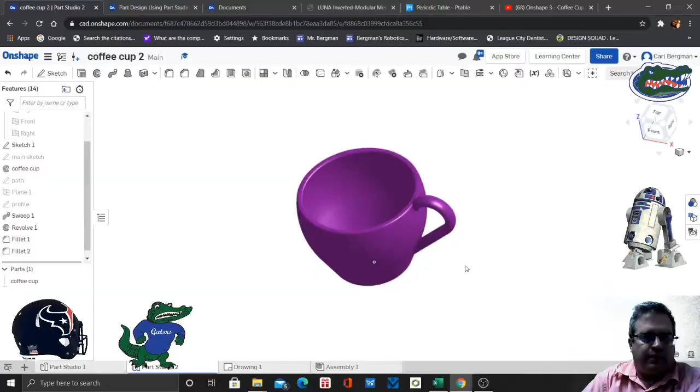Alright guys, we're going to create a coffee cup that you can drink out of. Alright, so first off you're going to go and create your sketch, call it coffee cup, and you're going to sketch on the front. This is a self-paced tutorial that is in your learning center that you can, I'll show you that tomorrow. Kind of a step-by-step guide on how to do this.

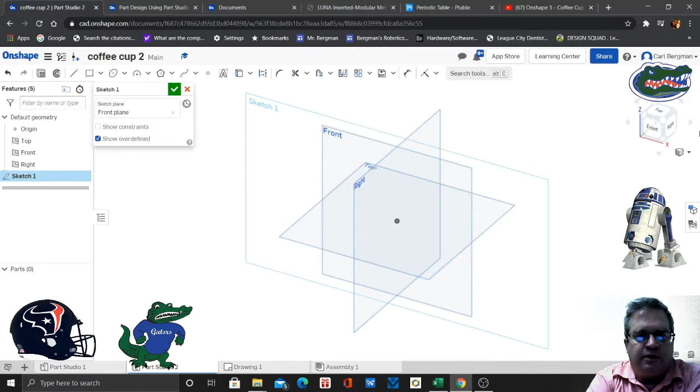We're going to go sketch and we're going to select front, and we're going to trace the profile of your coffee cup. And this is just going to be a cross section with the thickness of your coffee cup at about 6 millimeters, and that also includes the bottom of your coffee cup as well.

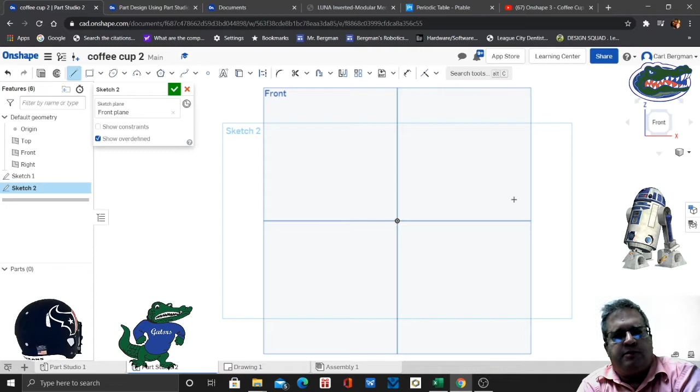You don't want your coffee cup to be too thin or it will melt, or it won't hold the heat in, and when you're actually holding your coffee cup you can burn your hands. So 6 millimeters I believe is the recommended thickness on a coffee cup that's made out of plastic, and this will be made out of plastic. So

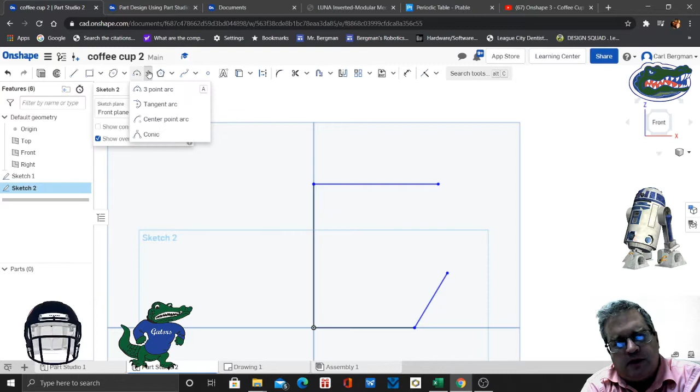make sure at one point that you cross the point of origin there in the center, and we're going to press escape to let go of the line, or you can go press the line. 3-point arc, we're going to connect that and make sure that it gives us the tangent symbol there, right there, and click OK, or click on the line. We're not going to click OK yet, so we got to do our dimensions first.

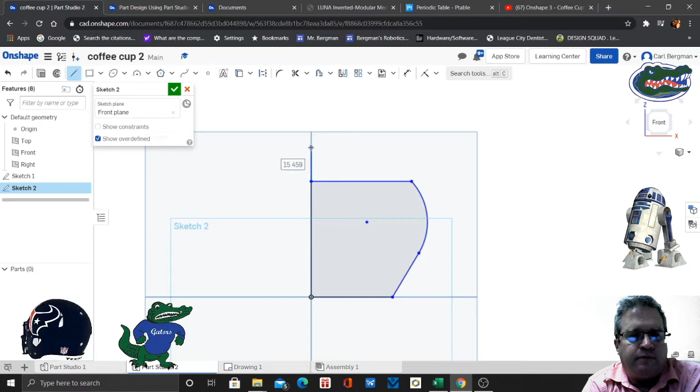Alright, so we're going to create a construction line, which is going to be our center of rotation. Just FYI, make sure that line is a little bit longer than the one I just drew there, because we're going to change the height of the coffee cup, and that thing's going to get buried. So self-paced tutorial is pretty detailed. We have to put in our diameter of our top and bottom. This is probably the trickiest part.

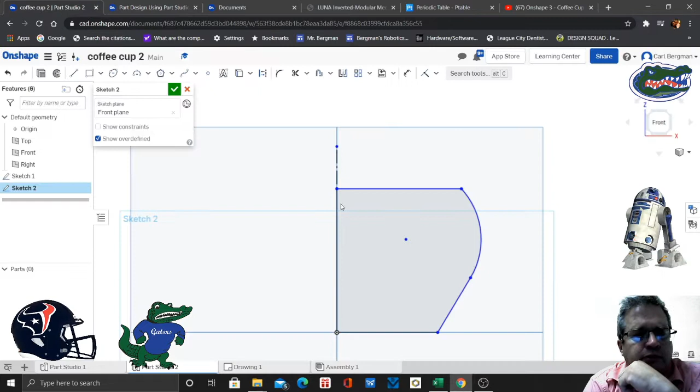You have to select the edge point dimension, the point on the edge, and then your construction line, and that's going to give you the diameter of the entire top of the cup. So you got to do it in that order. Well, actually not that order, but you have to select those 2 points, the line and the edge. Do the same for the bottom. You have to select the bottom point in the construction line, and that's going to give you the diameter that everything's going to rotate around.

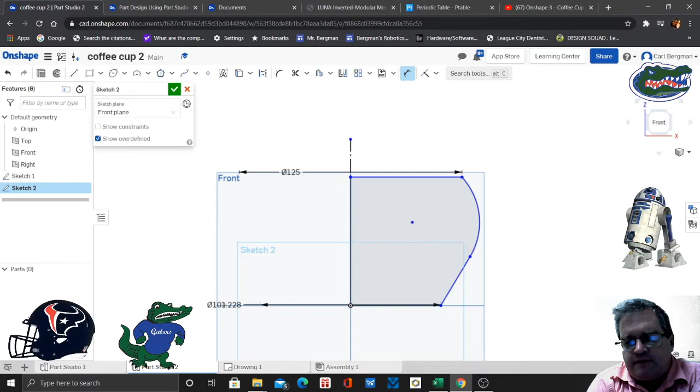So this is constraining it to the measurements. Otherwise, it's not going to revolve correctly. It's going to have some weird outcomes. All right, so you want to make sure that you can see your numbers, so that if you want to go back and edit this stuff, it's easy to locate your numbers. All right, so

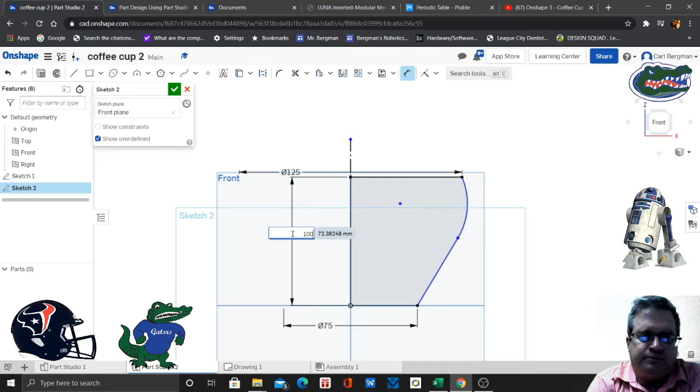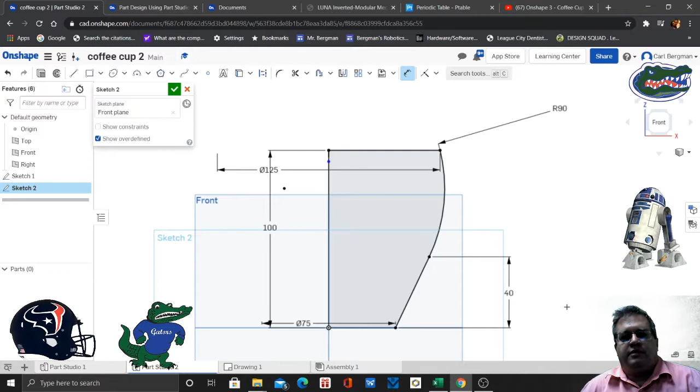okay, that's going to be a 100 millimeter height on your coffee cup. I don't know how many inches that is, but then we just buried our construction line. Then from there to there, I believe is it 25, 40. Okay. Then the radius, I believe, is 20 or 25. Better check. 90. I'm thinking of the pegboard that we're doing. Okay, so 90.

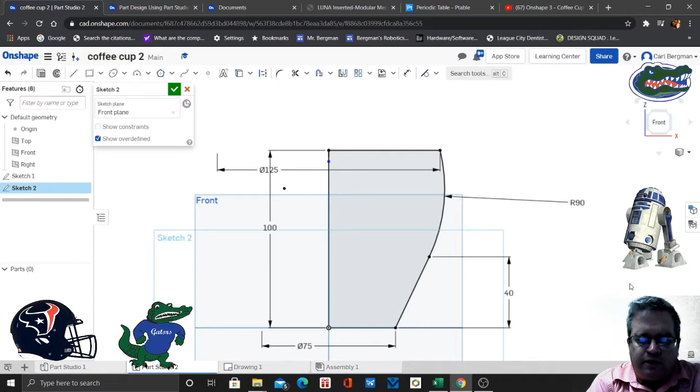All right, so deselect your dimension, drag the numbers down to where you can see what's going on. Just to be on the safe side, make sure those two sides are tangent. I've seen some weird things happen where you throw measurements in and it does some weird stuff to your sketch. All right, so now we got our measurements in, so we're going to do an offset.

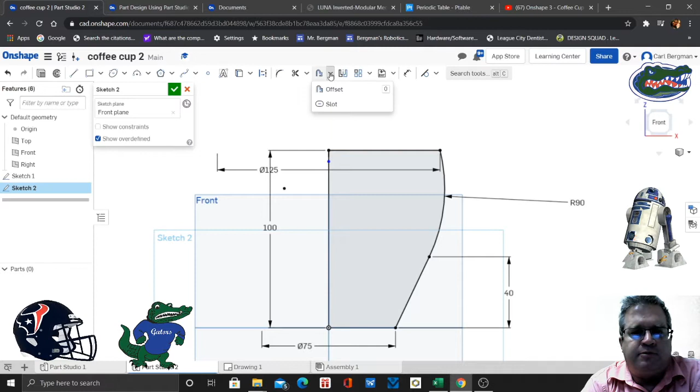So we're going to basically select the outer edge of our cup, do a 6 millimeter offset, and that's going to give us a 6 millimeter thickness on our coffee cup. All right, so find the offset button, and there it is. And we're going to select the bottom and the 2 segments on this side. And I think the default is 6 millimeters, but

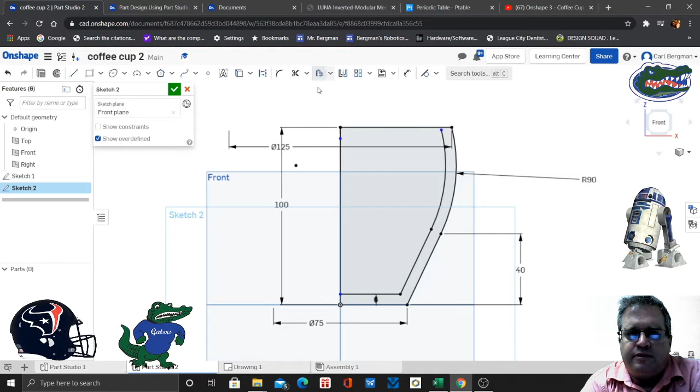we'll have to see. And also, you can see that I'm not connected at the top, so you can stretch it out and see what the number is, and you just type in 6, and there's our measurement, and turn it off, and then drag it down to the bottom.

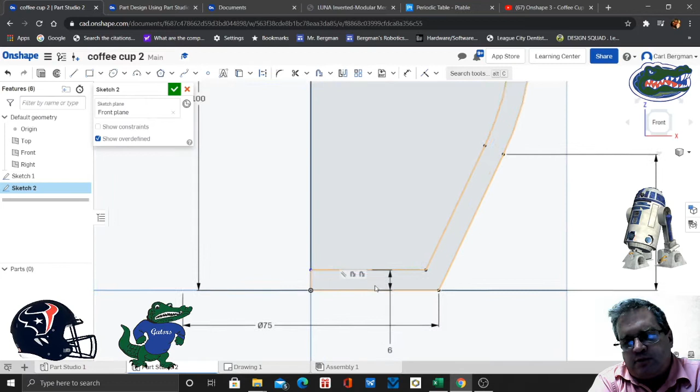So if you look at the top and it's not connected, that's not going to extrude or revolve correctly, so you have to fix that. So you select the end point and then the line, go to the top and pick coincident, and it's going to connect that. And then you want to check the bottom just to make sure. It looks like it is, but sometimes it's not. But you can click on the show constraint and it'll show you whether or not it's connected, and that's the little constraint symbol.

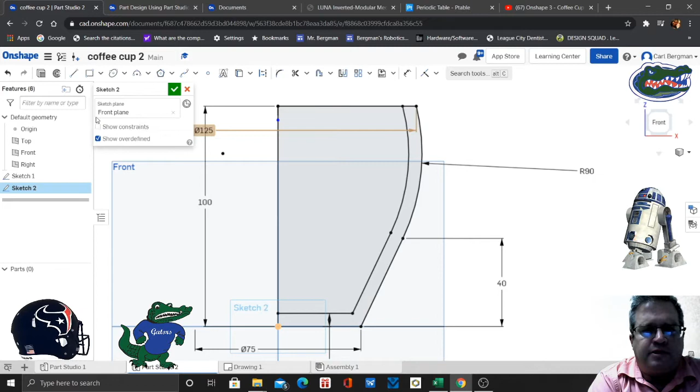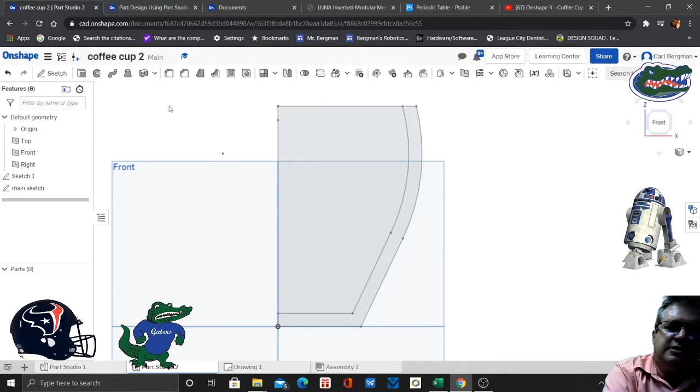Looks like everything's good. So this is your main sketch. And so you click on the little pencil, and it'll let you edit the name and type in main sketch. So there's the pencil, and type in main sketch. And this helps if you want to go back and change the design of your coffee cup before you print it.

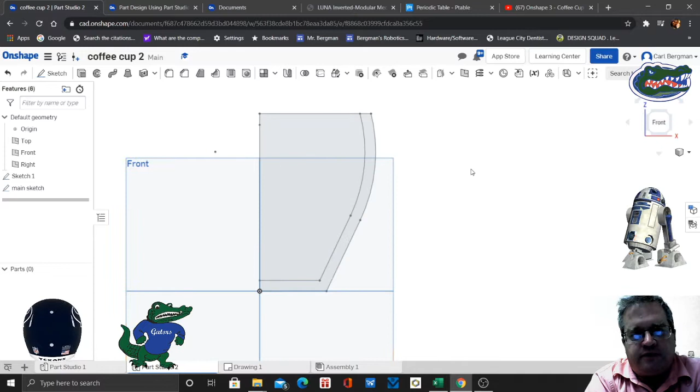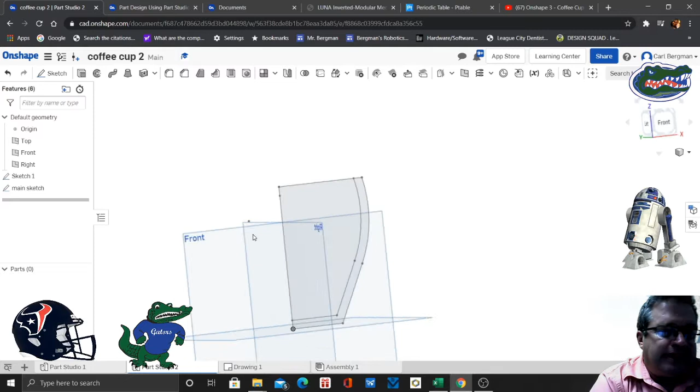Next, we're going to revolve, and so we're going to make a solid cup, and then we're going to hollow it out after we put our handle on it. All right, so we're going to revolve, and we're going to pick both the inside of the face and the offset. Revolve axis is, we're missing our construction line, so we have to go back and draw in a construction line. So you have to go to main sketch, right click and edit, and that will allow us to put in our construction line.

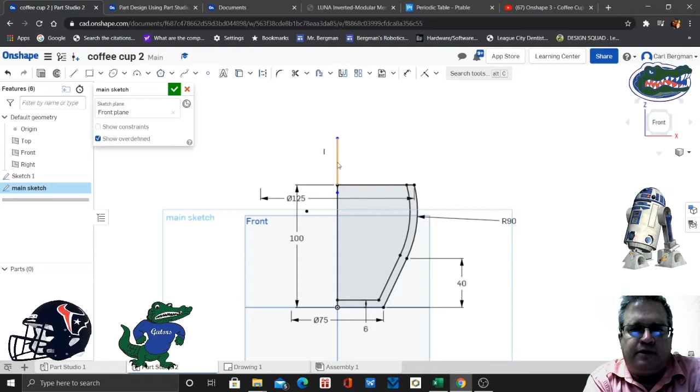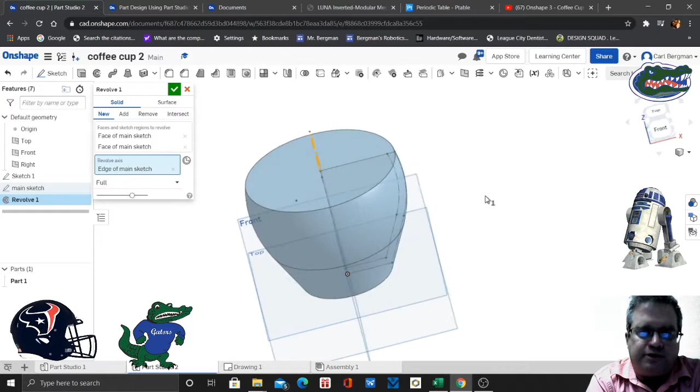Okay, so we have to reapply our construction line. No big deal. Escape to let go of the line, and then select the line again and pick construction. All right, and then click OK, and then we're going to go create our solid coffee cup. We pick our two faces, and then we pick our revolve axis, which is the construction line.

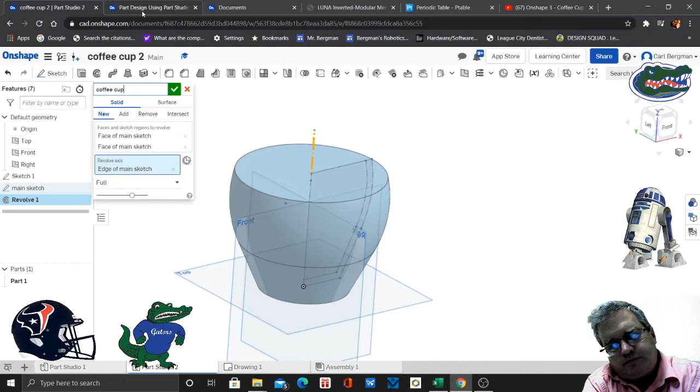All right, so then we're going to rename, and that's going to be renamed as coffee cup. Click on the pencil and then type in coffee cup. All right, so next part is the handle. This is the trickiest part of the sketch because we have to do a tilted plane.

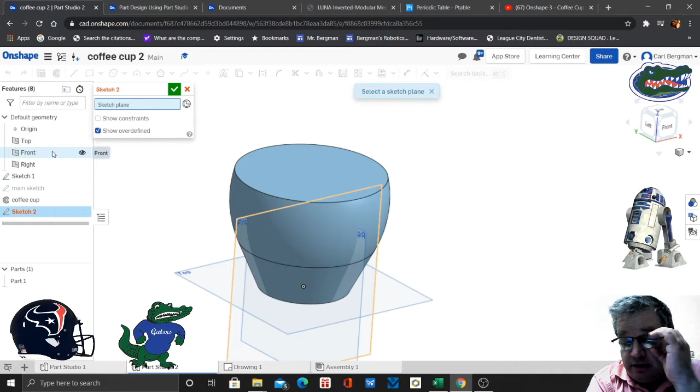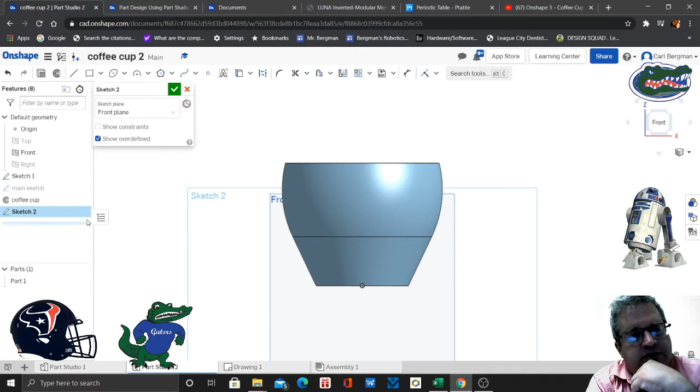All right, so you turn on the front plane, and we're going to turn on the main sketch. You want to see the main sketch, so turn that on so you can see it. So our line that's going to be our handle is going to be attached to the inner side of the cup. We want to make sure that handle is securely printed into the cup itself.

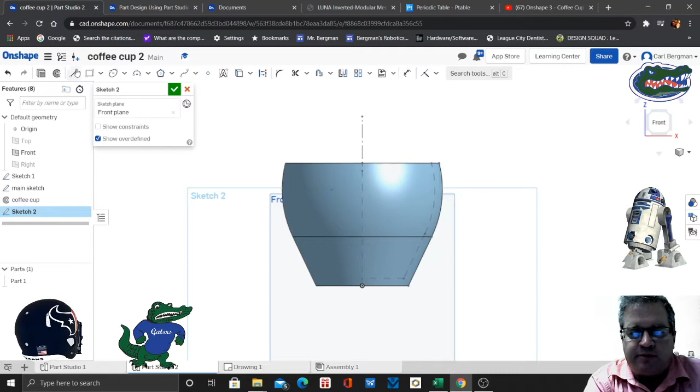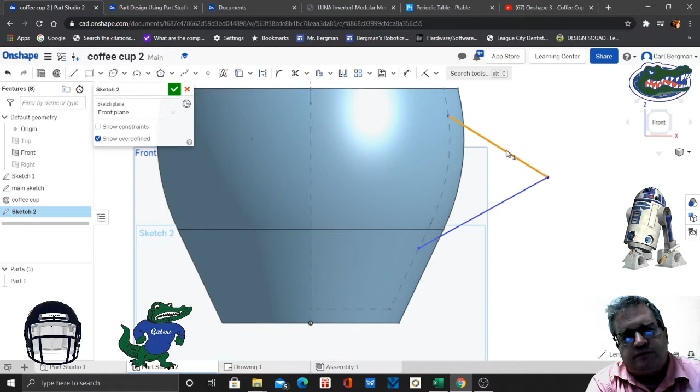So we're going to go to the inner line, and we're going to draw out, not straight, kind of a diagonal, the bottom of our handle, and then we're going to create a reference point construction line because we need 2 points for our arc. So that second line is going to be a construction line, and then we're going to do a 3-point arc.

Make sure it's tangent, and you'll see the little tangent symbol. There it is. Place it, and then my arc is, you have to make sure it's not a construction arc. So there you go, get the tangent and place it. So you get the tangent symbol there, and then we're going to look at dimensions, which is 25 and 85. So the bottom is 25 millimeters from the bottom of the cup.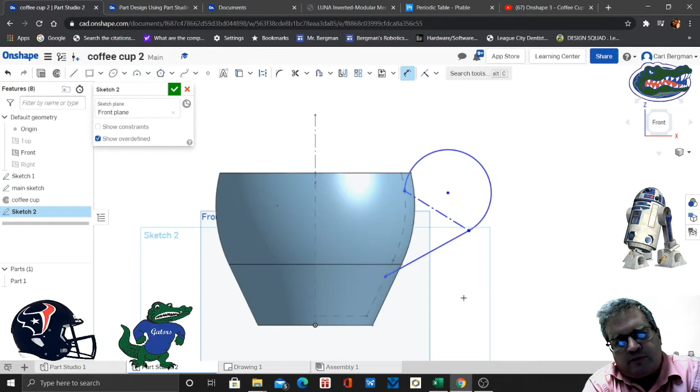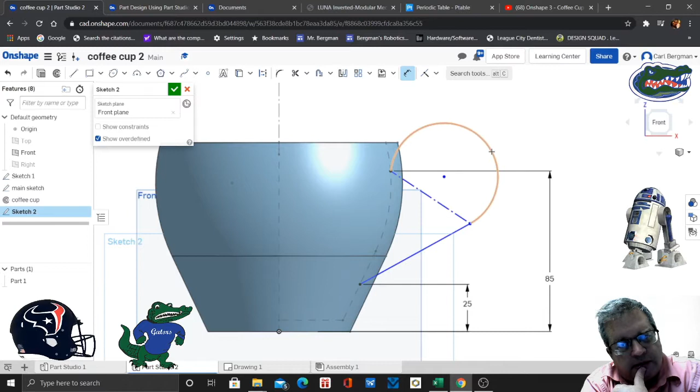So if you have a mistake in your connections on your main sketch, you're not going to be able to place these measurements there. It's not going to let you do it if there's a problem with your connections. All right, so that's going to be 25 and 85. So it's 85 on the very top. All right, so then that arc is 20, and that brings it way down.

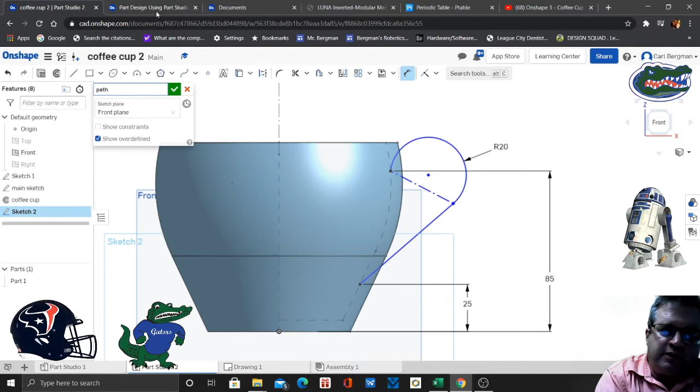Okay. Now we have to create a starting point for our sweeping action. Oh, this is the path. This is the path for the handle. They just call it path. Okay.

So if you, oh, excuse me again. So if you want to go back and switch the path height or from the bottom or the top, then you can quickly select the path. All right. So what happened to my top?

I think my Norton antivirus is coming on.

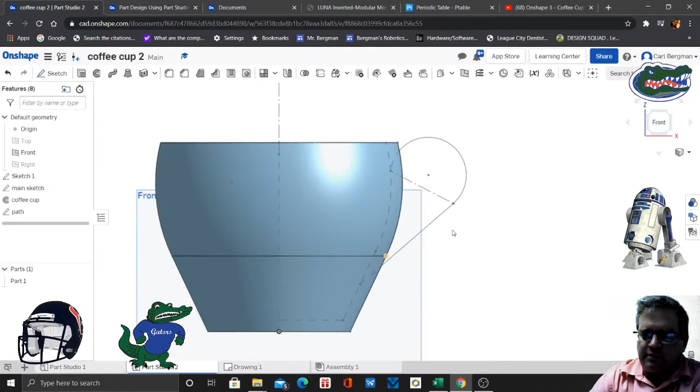All right, so now you're going to go create a plane, and it's going to be a curve point, and you're going to select the entity, which is going to be that line and the end point, and that's it. And so it's going to create your curved point, and then you click OK.

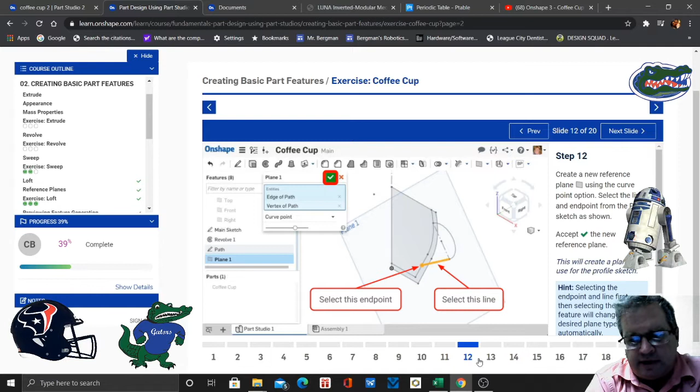And then on that plane that you just created, the tilted plane, you're going to create an ellipse, and it's going to be 10 by 14, and that's going to make it a little bit thicker on the width than on the depth of your handle, and that actually creates a little bit of a sturdier handle.

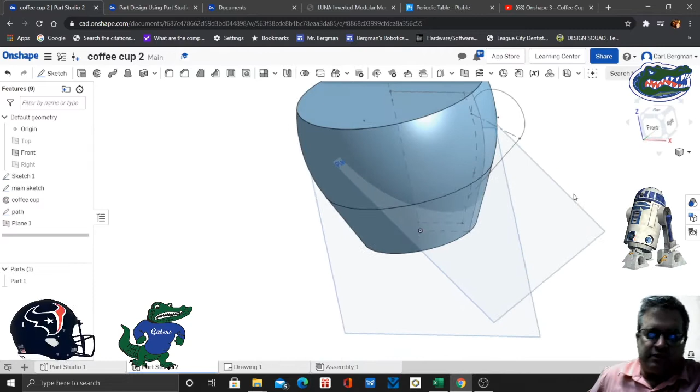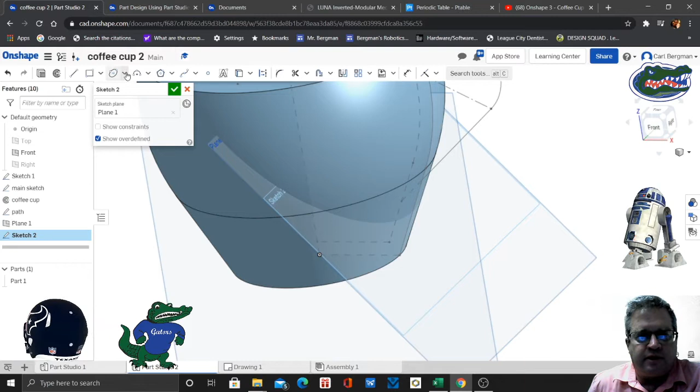All right, so we're going to sketch on that new tilted plane, and we're going to just do a single ellipse (10 by 14). Okay. All right, so sketch and select ellipse, not a 3-point circle, an ellipse.

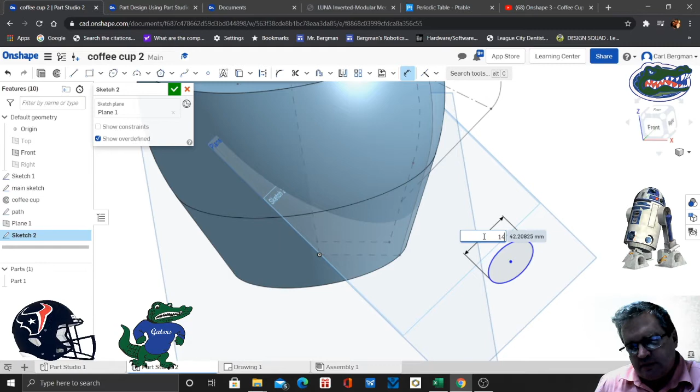Then you get the dimension tool, and the dimension tool is going to help you fix this. All right, so from left to right is going to be 14. That's millimeters. If you're on inches, this is not going to make sense. And then from top to bottom is going to be 10. All right.

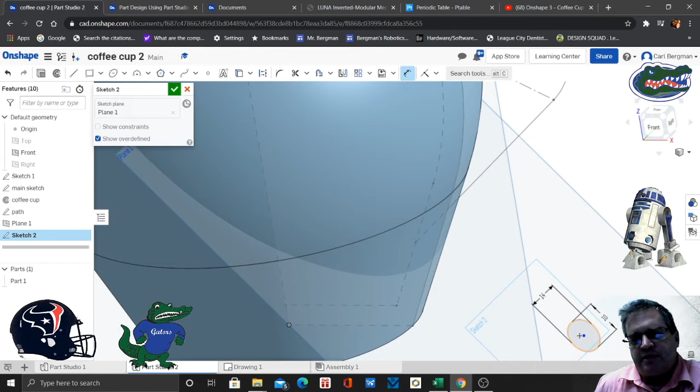All right, so first of all, deselect your dimensioning tool, or it's going to think you're trying to get a measurement. You want to select the center of that circle and the end point, and make sure your tool's turned off, any warning dialog box is turned off. So select your point and then the center of your circle, and you're going to go coincident.

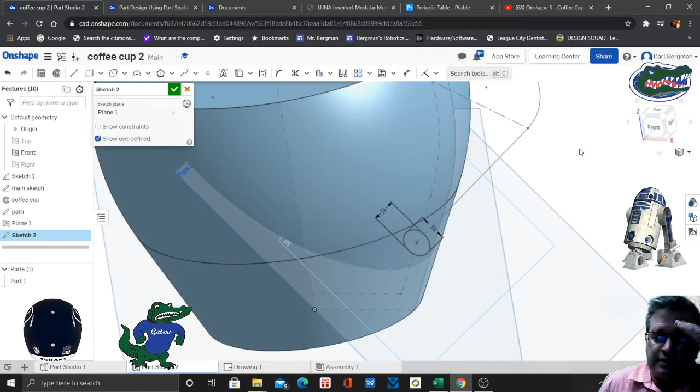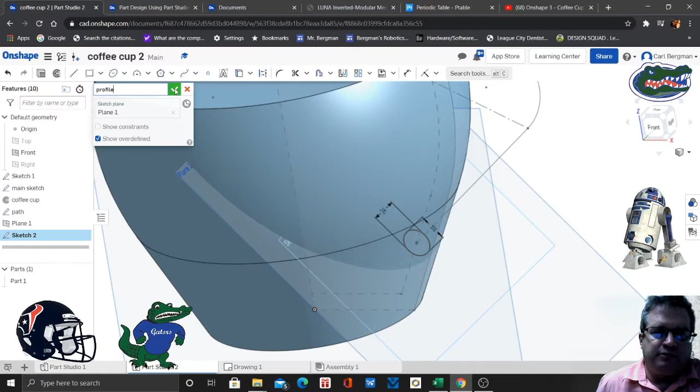And then looks like you're done, and now you're going to do the sweeping tool, and then we're going to flare the edges, the top and bottom, so that the rounded off top is going to help so you don't injure yourself while you're drinking your cup of coffee. So this is a profile, and this is what your handle is going to look like. So that's what we call the profile. It's the depth and width,

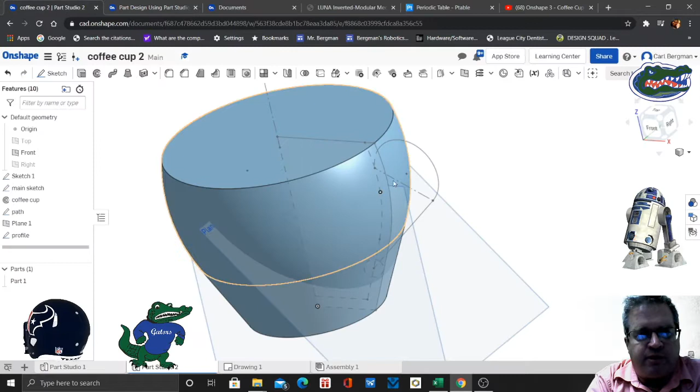and you've got your path already drawn in. So now we're going to go to the sweeping tool, and we're going to create our handle. And then it's important also when you do this that you merge with all. You want the handle to become part of the cup. You don't want it to be a separate part.

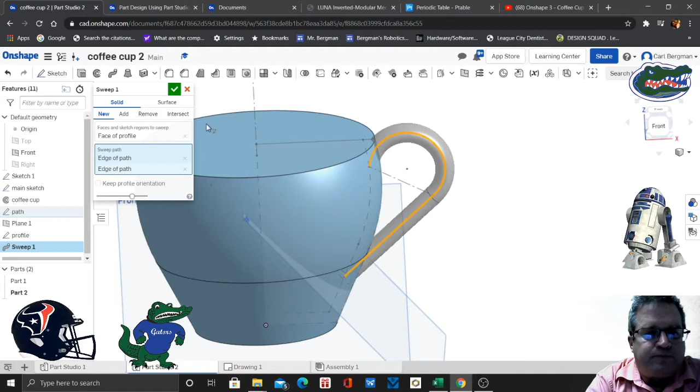So we're going to go sweep, and we're going to select our face, which is the, turn the coffee cup off. The face is going to be the ellipse, and then the path is going to be the two segments, the circle arc, and then the line segment. So there's your handle. Merge with all. Click on add. You're going to add and merge with all.

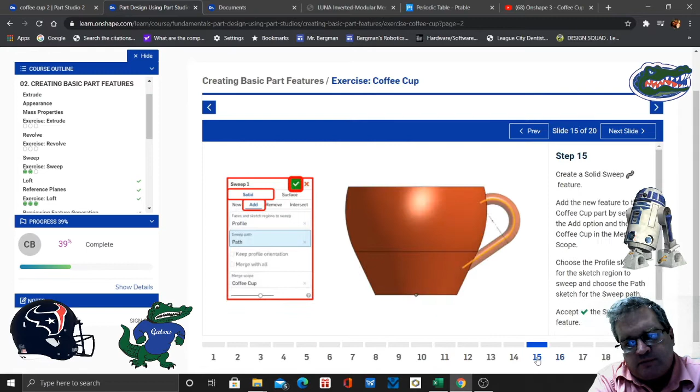And now we're going to hollow it out. This is a little bit trickier. That's why it's important to have your construction line above there, because our first attempt buried it. But you see it up there. All right, so now we're going to hide our planes, and we're going to carve the middle of this out.

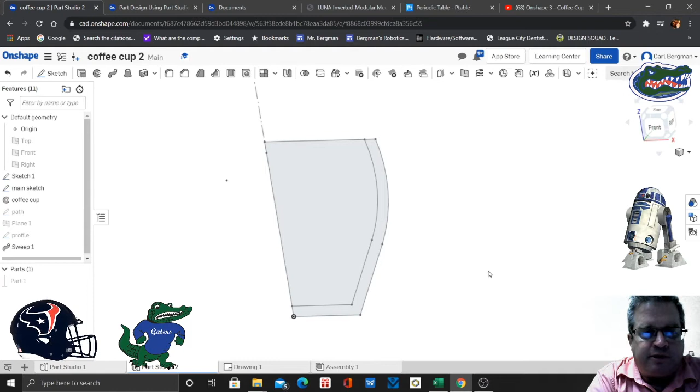The reason we carve the middle out at the end is because we want to also carve out any of the edges of the handles that protrude into the middle of the coffee cup. We want to carve that out as well. So that's why we're doing this last.

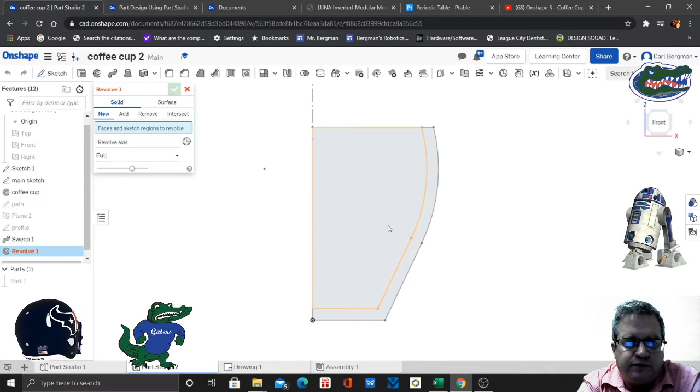All right, so we're going to go revolve and remove. Okay, so we're going to remove the inner face, not the offset. We're going to remove, and we're going to merge with all.

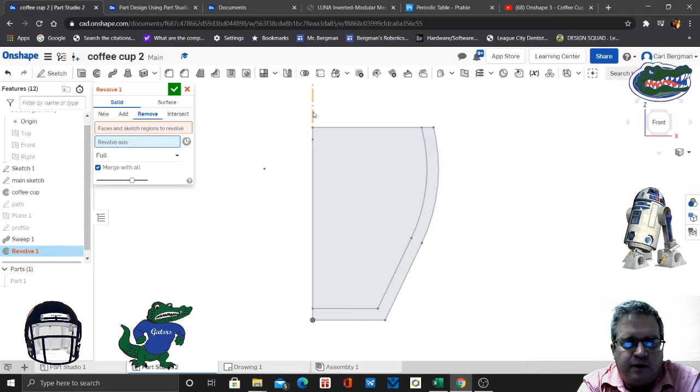Face of main sketch is going to be, I think I just deselected it. Yeah. So we're going to pick the axis, and I accidentally deselected the face, so I have to go back in and reselect the face. So turn the coffee cup off and reselect the face, and then I got merge with all and remove, and that should be it. And then turn the coffee cup back on, and then it's carved out.

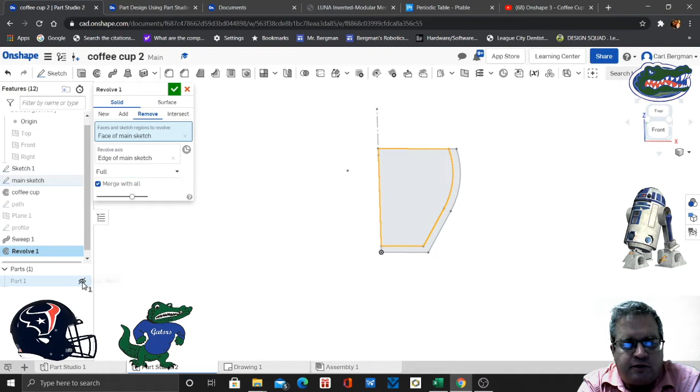So then you can click OK, and there it is. There's your coffee cup. Now, obviously, you want to round off the top, so you're going to round off the inner circle and the outer circle with the fillet, and then you're going to want to round off the bottom a little bit, not too much.

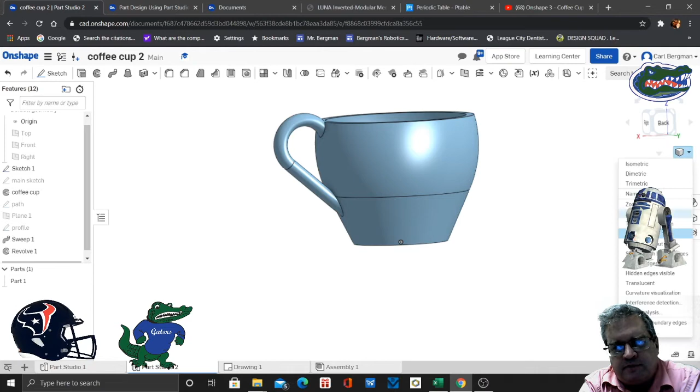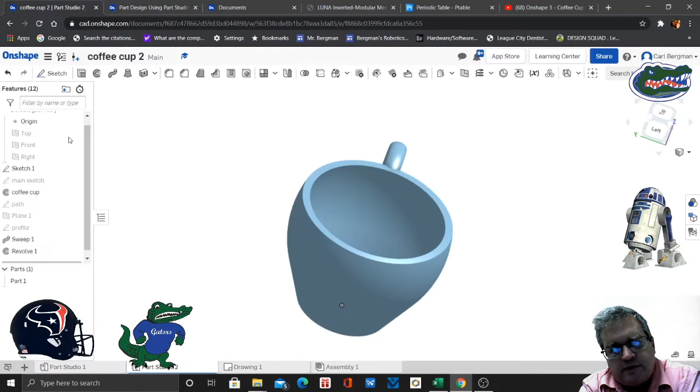Select hidden edges by that little gray box above R2D2 there, and then we're going to take 12 millimeters off the bottom with the fillet, and then let's see here. So tilt it up, and we're right clicking to rotate or orbit. We're going to fillet, and then we're going to go, I think it's 12 millimeters, I believe, and that should

be it. If you see that arrow down there, you can also pull that arrow up and manually adjust it, and it'll adjust as you push up on the arrow. But yeah, you don't want to take too much off. 12 millimeters is enough, and then I believe the top is going to be 5 on the outside and 5 on the inside millimeters on the fillet, and you just want to round off, smooth off the top.

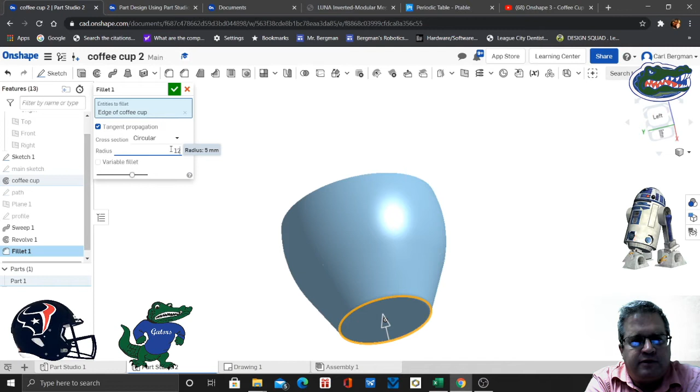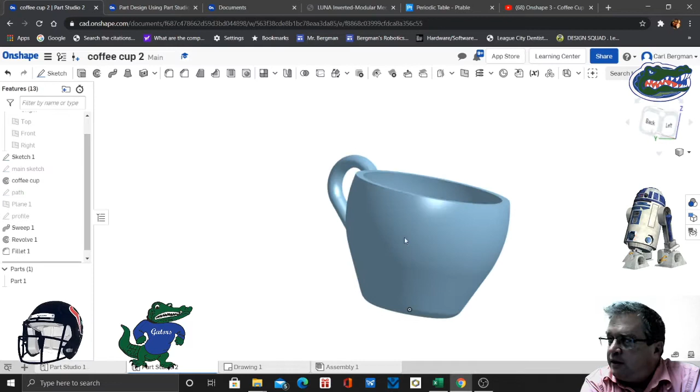And let's see if I didn't lose my page here. So yeah, click OK, and there's the smooth bottom of the cup. And now we have to smooth out the edges on the top, and then we'll have a nice coffee cup. So you can use the acrylic paint we have in the classroom to paint this. I'll set up the two tables up the front of the classroom to be kind of the project area. Want to make sure we don't get any paint on the floor, so maybe put a piece of the construction paper below you, just to be on the safe side.

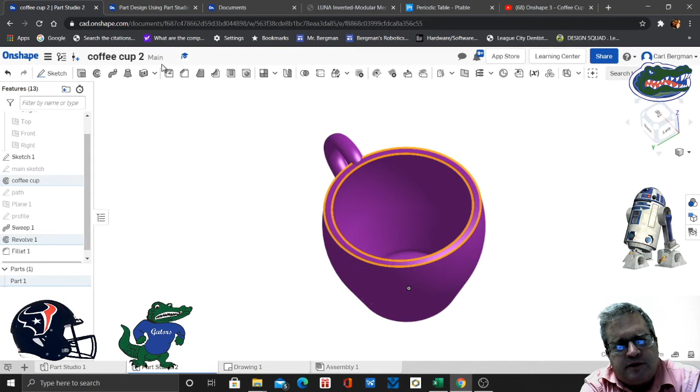All right, so let's see here. All right, it's just a 2 mm fillet on the inside and outside diameter of the cup there. So you can select the edge and just smooth it off a little bit. So select both edges and then go up to fillet and then put in 2 mm. There you have it. There's your cup. All right, and remove the edges. So you want to remove the edges before you send it to me.

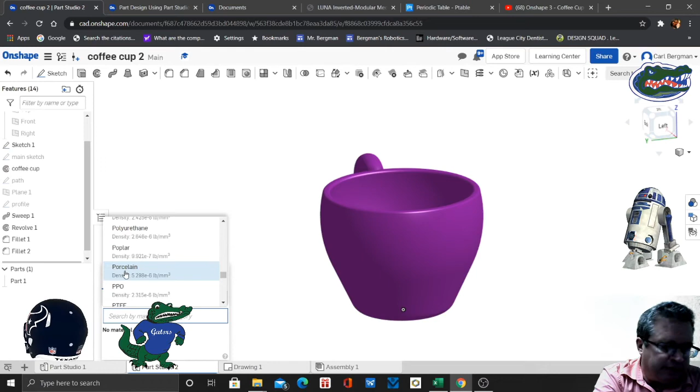You can export this, and I'll probably show you how to do that tomorrow because we're gonna have the printers here in a couple days. So you send me this file as an STL. I upload the STL to the printer, and then you guys can print this thing. Eventually, I will show you how to upload your own file and print it. I just have to make sure that the type of printer that I get, I haven't seen it yet, is one that I'm familiar with. They may have a Wi-Fi capability to where you can just send it straight from your computer to the printer.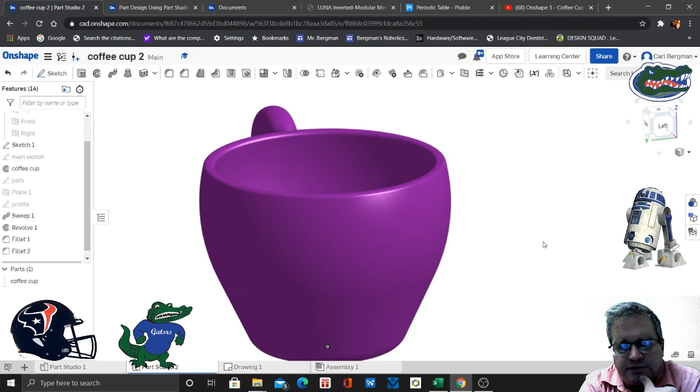But before you send something to the printer, you have to make sure the printer is completely cleared of any debris, because if it starts printing and there's something in the way, you can actually burn up a motor because it keeps on pushing down on whatever that object is, and if you didn't clear it out of the way, then the printer doesn't have the ability to remove that. So you have to make sure you inspect it before you print. So that's going to be a whole another day of walking through the do's and don'ts of using a 3D printer.